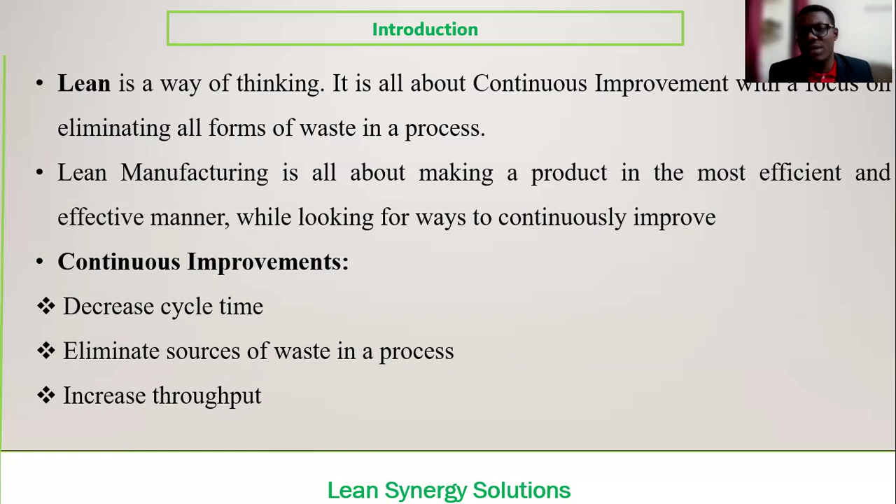And continuous improvement is also about lean thinking. You can actually see how best you can decrease your cycle time, which is very, very important to actually know the average time each unit is being produced. And also, continuous improvement can actually help you to eliminate waste in your process and also increase your throughput, which is very, very important. You can also streamline and see how you can optimize your lead time.

So we want to look into the history of lean. As you all know, there are pioneers, there are people who have contributed significantly in the lean thinking process. And one of the pioneers is Henry Ford. Henry Ford implemented the lean methodology in his assembly line in the early 1900s, working on continuous improvement.

And later, after the Second World War, another two pioneers, namely Taiichi Ohno and Kiichiro Toyoda, also took aspects of Henry Ford's new ideas for continuous improvement. They saw how best they could actually make this particular system more strategic. That is why they created the Toyota Production System, which is very, very important. So these are the pioneers of lean manufacturing.

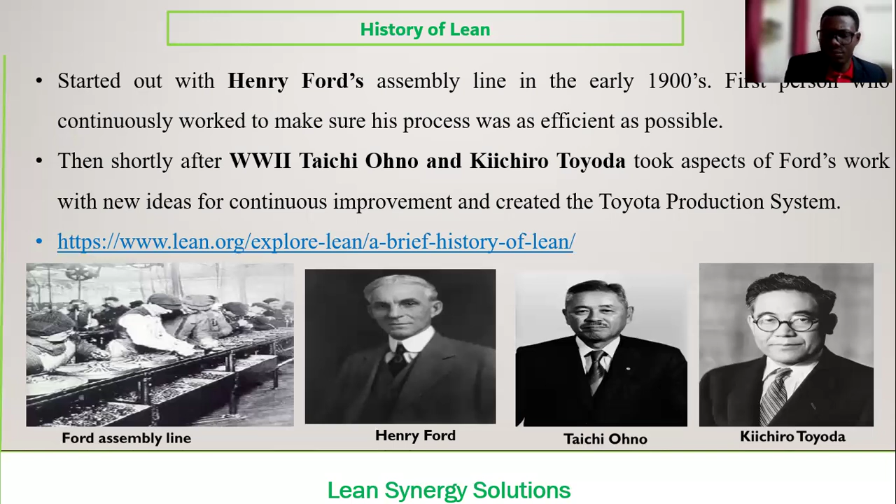So we want to look at these three key terms that are very, very important: Lean, Six Sigma and Lean Six Sigma. As you all know, Lean is talking about waste reduction, wherein you can actually use an iterative method. That is the PDCA: you plan, you do, you check and you act. That is why Lean is very important.

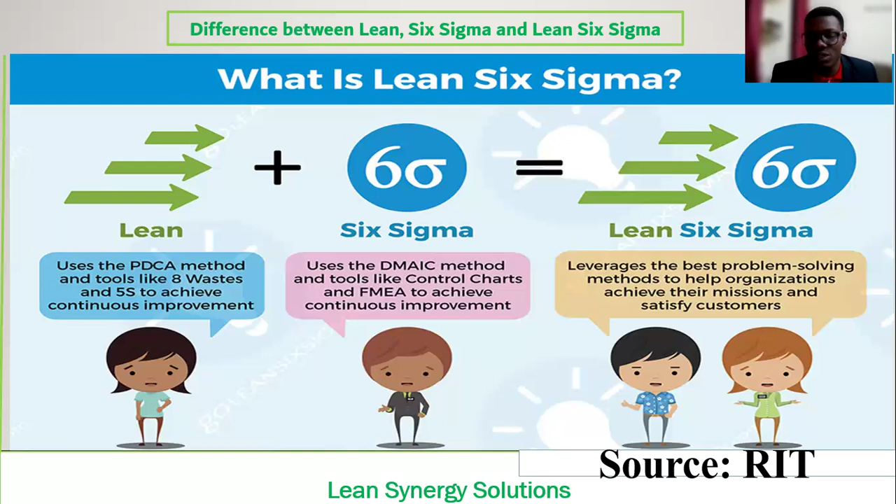When we come to Six Sigma, it is a data-driven methodology that can actually help you to define, measure, analyze, improve, and control your process. So Six Sigma is very, very important. It can actually help you with a continuous improvement strategy. And when you leverage Lean and Six Sigma, you can actually control defects and certain bottlenecks in your process, in your system, okay? So these key terms are very, very important.

So now we want to look at one of our lean tools, 5S. 5S is very, very important. It's a methodology that aims to improve efficiency and eliminate waste. And this one is an easy but powerful method of reducing waste and increasing productivity on your shop floor, in your small or medium enterprise. So therefore, each S stands for something that is very important.

So one is you have to sort. That is clearing. Sorting can actually help you to separate things that are frequently used or not frequently used. You try to sort items based on their usage, okay? And you try to set in order. Like I mentioned, frequently or not frequently used items, try to set them in order, wherein you can apply what's called a red tag to those things that are not being used.

And also, after setting the environment in order, you try to shine, that is, you clean, and you try to standardize, maintain conformity, and you try to sustain that, which is very, very important. So 5S is very important to ensure your environment is clean, because if your environment is clean, quality can be maintained. And even you as an employee feel good working in that environment.

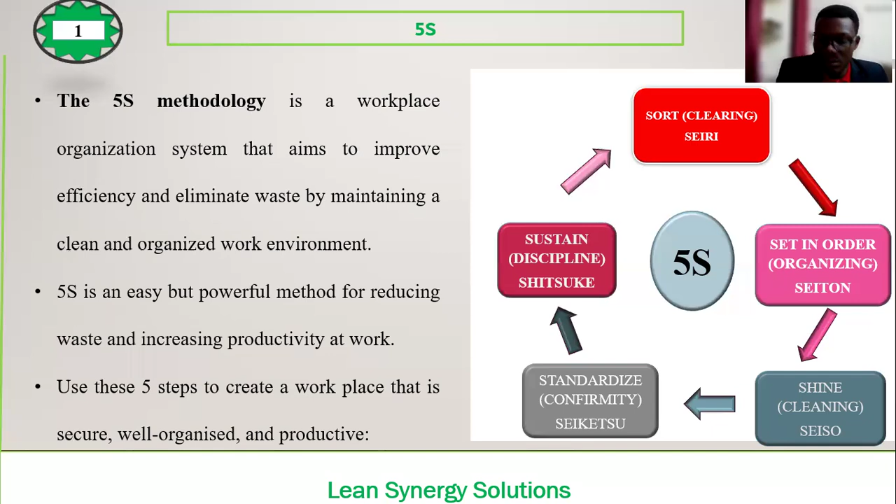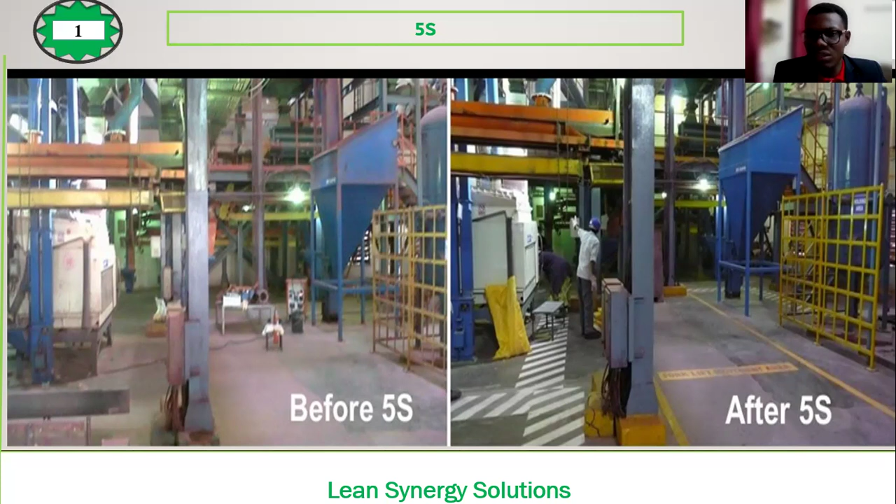As you can see, this is an example of this production plant. Before 5S, as you can see, and after 5S, you can see the environment is clean and you can see how things have been organized.

So we want to go into the second tool, that is the ABC analysis. As you all know, inventory is very, very important because inventory can help us to produce after receiving an order from the customer.

So therefore, your inventory can be your raw materials, they can be your work in progress, they can be maintenance and operation supplies. All these are inventory you have. So if you cannot manage them well, you run into losses, okay? And therefore, applying the ABC analysis can actually help you to classify items based on their significance.

For A, you have to categorize items which are very expensive, like maybe your maintenance supplies, which are very expensive. So you have to see how best you can actually control them, okay? And also for the B, you have moderate value inventory, okay? And C for low cost inventory. So knowing this ABC analysis can actually help you to categorize your items, which is very, very important.

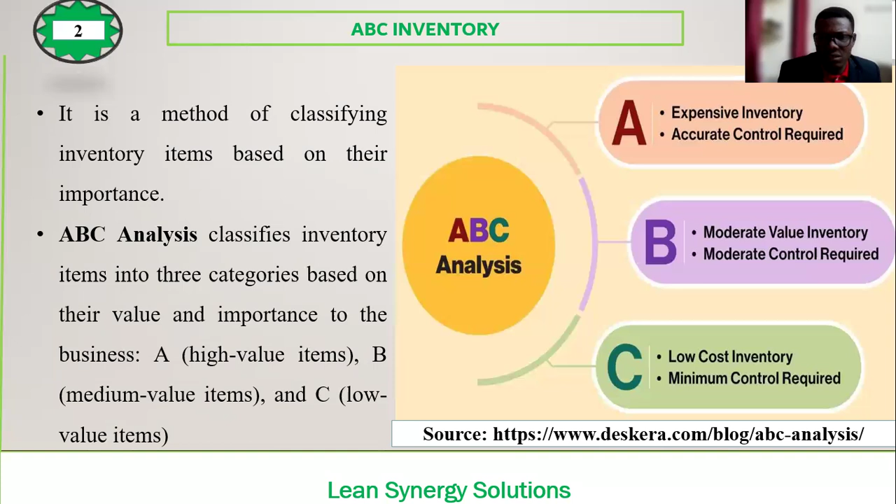Another one is the bottleneck analysis. As you all know, we have some problems, some bottlenecks in our production process. So trying to look into the bottleneck analysis can actually help you to identify inefficiency, constraints in the production process or in your services, okay? So therefore, bottleneck can occur anywhere in the process.

As you can see, an example here, the bottle, you see the neck. So there is a bottleneck problem. The balls cannot move out. So you can see there is a problem in the neck of the bottle, which is a very small one. So try to identify, try to streamline your process and see some constraints which can actually help you to optimize your process.

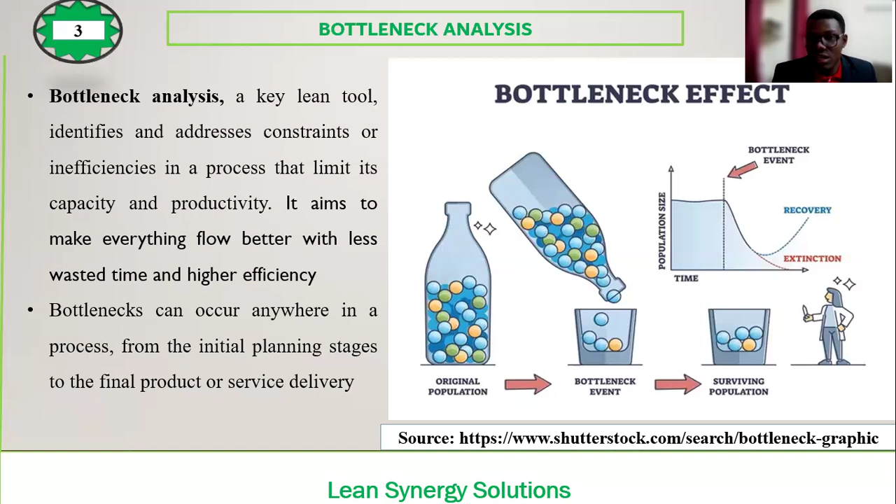Another one is the andon system. As you all know, we are in a digital era. Integrating technology into our production can actually help us, okay? So the andon system is a system that actually alerts operators about a problem, okay? So if operators see a particular problem, they go to the andon system, they alert everyone in that organization that something has happened.

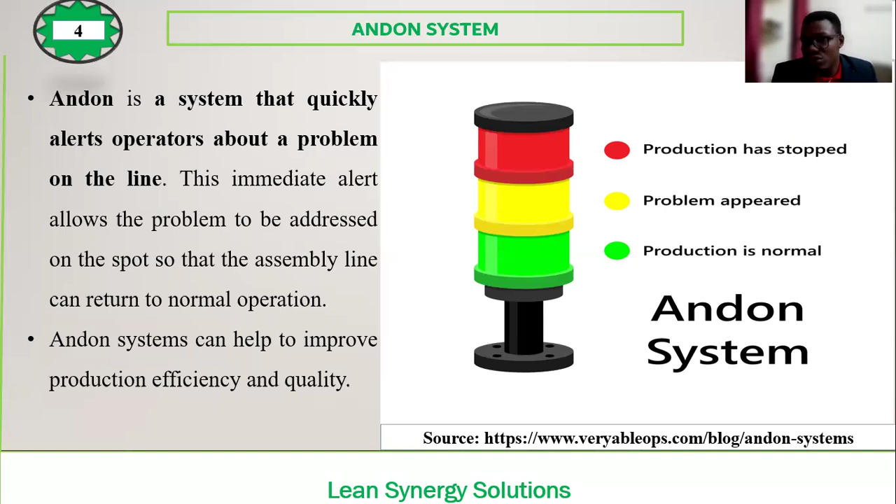And the symbol signifies something. Red, production has stopped. Yellow, a problem has appeared, and green, production is normal. So this particular system is very important. It can actually help you to tackle certain problems in your production process.

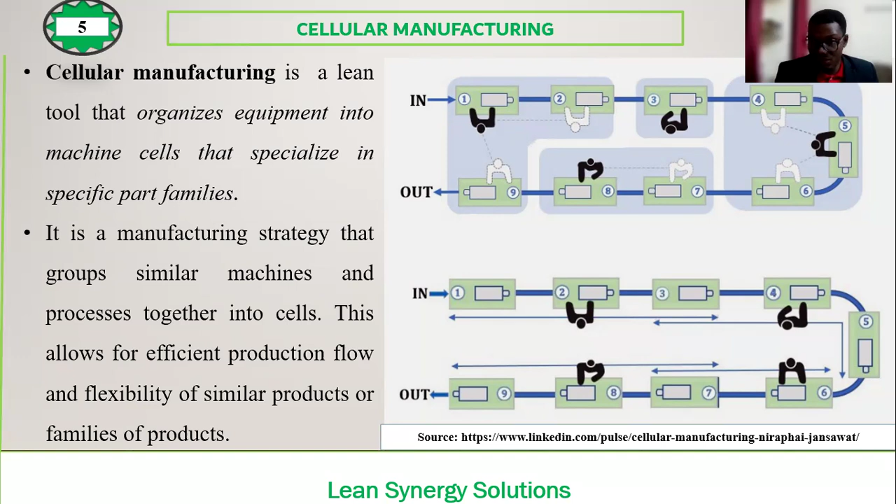Another one is cellular manufacturing. It's a lean tool that organizes equipment into machine cells that specialize in specific part families, okay? You try to organize machines that are performing similar functions together. This can actually help you to reduce the manpower, okay? And you can make your shop floor very organized. So cellular manufacturing is another lean tool which is very, very important.

We go to continuous flow. When you talk about continuous flow, it is also a key lean principle or strategy wherein you produce one piece, that is one piece flow, single piece flow, or make one, move one. Raw material coming, you try to finish that particular product. So therefore, continuous flow is a very, very good lean tool. It can actually help you a lot.

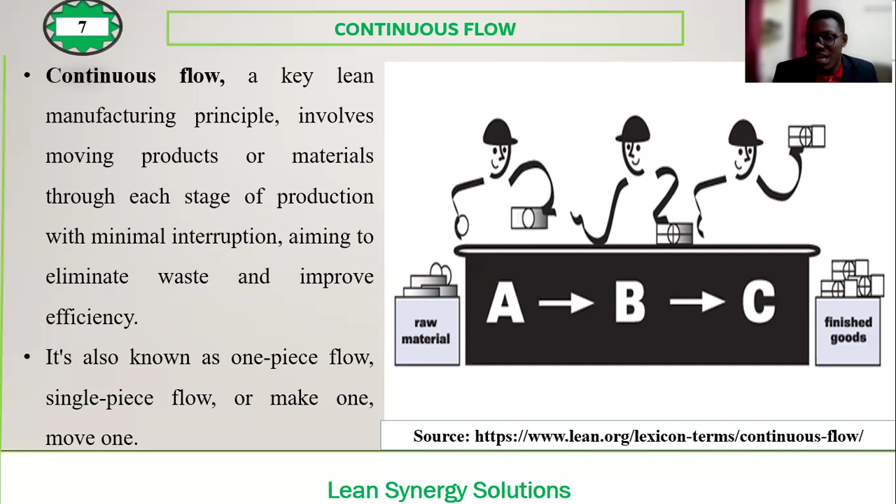Another one is Gemba. Gemba means the real place, the actual place where something is happening. So, therefore, trying to improve your process, you have to go to the real place. This can actually help you. You cannot sit in your office or wheresoever you make decisions. Go to the real place, try to identify. You understand? That is why we have 8 steps in the Gemba walk.

Identify the purpose of the Gemba. You try to ensure that you understand the process. You select a time and you observe where value is created and where value is not. That is why we try to know value-added activities or non-value added activities. And you try to observe the process, recognize how the process performs, you visualize the gap and try to create some opportunities for improvement. So therefore, Gemba walk is very, very important to actually improve or optimize your process.

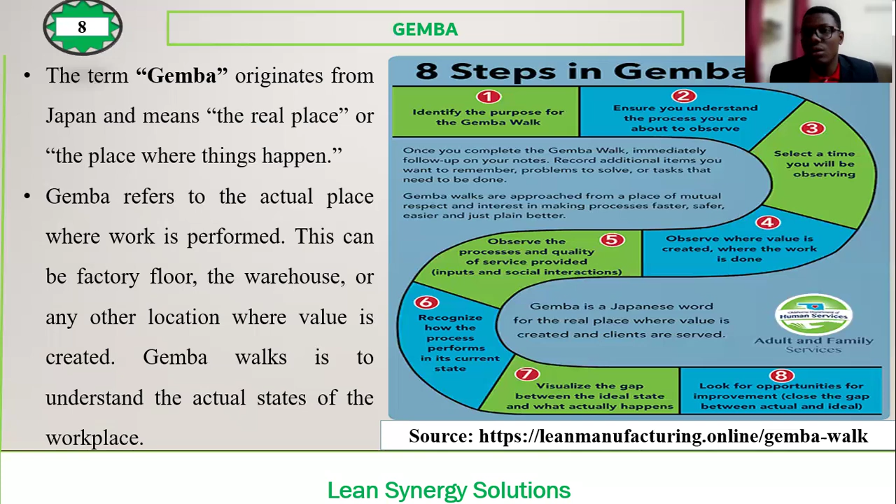Another one is Heijunka. Heijunka means leveling in Japanese. As you all know, every business, every company wants to see how best they can level up, they can scale up. So therefore, implementing Heijunka, you can actually produce with more uniformity. You try to reduce variability in your production process. That is why Heijunka is a very, very good lean tool. You try to make your production more predictable, more flexible, and more stable.

So therefore, Heijunka is a very, very good lean tool for you to level up.

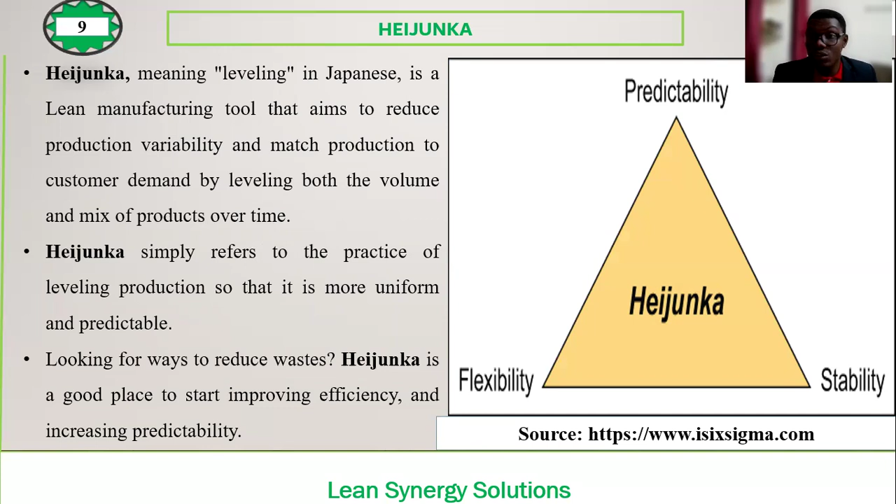Another one is Hoshin Kanri. Hoshin Kanri is all about policy deployment, wherein you ensure your company's strategic vision aligns in every aspect of your business. You try to ensure that the established visions or objectives align in all your management. This can actually help you to align the goals of the company, that is your strategy, the plans of the middle management, that is your tactics, and the work performed by all employees, that is operations. So therefore, policy deployment or Hoshin Kanri is a very, very good lean tool.

Because if your company has a strategic vision and that vision is not going down... we can say Hoshin Kanri is a top-down approach, and it is iterative, both top-down and bottom-up. You understand? Because you want to ensure your vision is being aligned in all sectors or all departments. So this is a very good lean tool.

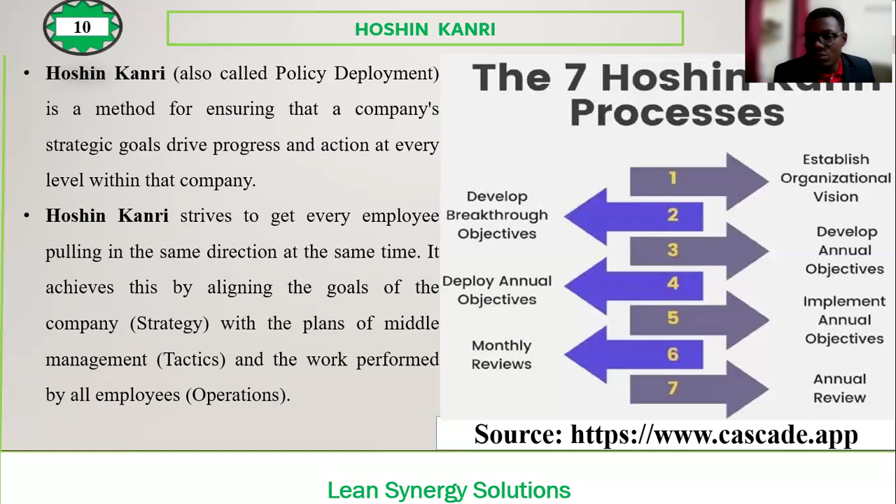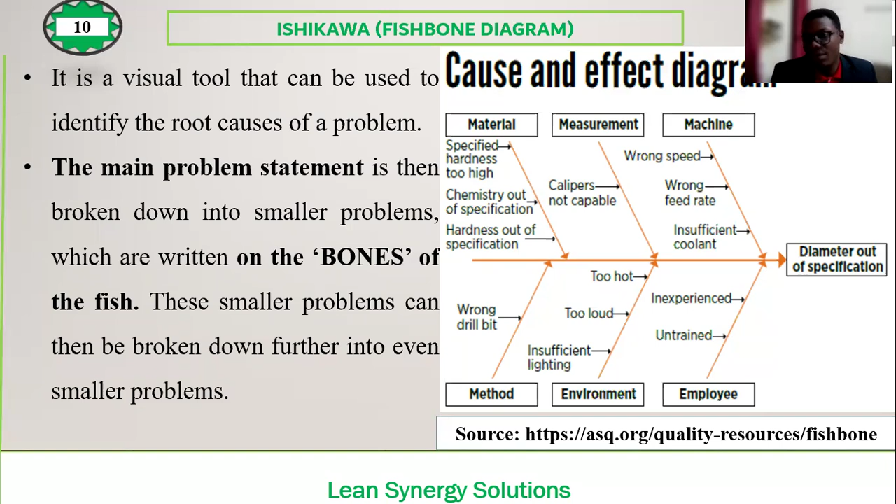Another one is Ishikawa, or the fishbone diagram, or the cause and effect diagram. This is also a very visual tool that you can use to identify the root cause of any problem, okay? And as you can see, you have the main problem, and this main problem can be broken down into smaller problems. And those smaller problems can be broken down into even smaller problems, as you can see. So this is an example. So the cause and effect diagram is very, very important for your root cause analysis.

And also we have another one, Jidoka. Jidoka is also a lean manufacturing principle that can actually help you to do quick identification and correction of problems, wherein you try to implement automation. You understand? Automation is very, very important to actually achieve scaling up and also efficiency and effectiveness of your production line. So Jidoka is very important. You try to ensure, like we have these robotic production lines, they can do things by themselves. So automation is very, very important.

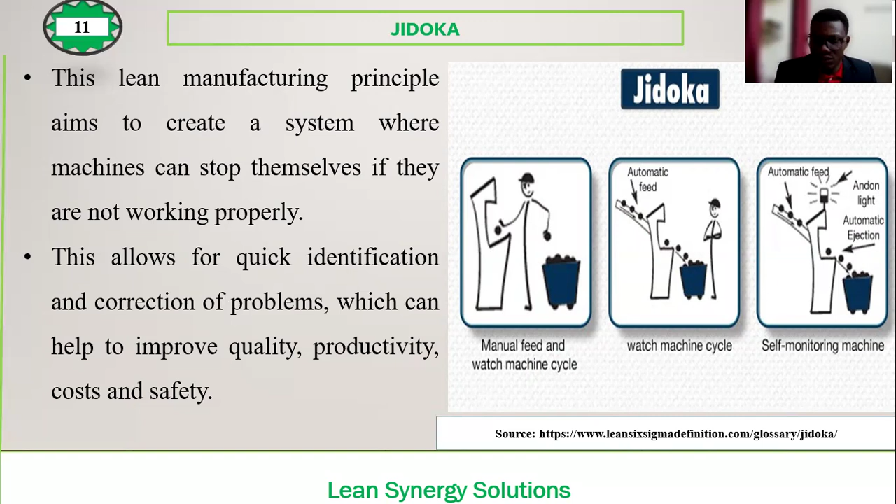Another one is just in time. Just in time is a very, very powerful lean principle. This can actually help you to produce or procure goods only when they are needed. This is like a pull system. You only do things when there is a trigger. And this can actually help you to manage your inventory and also to reduce waste. Okay, so just in time is a very, very good lean philosophy.

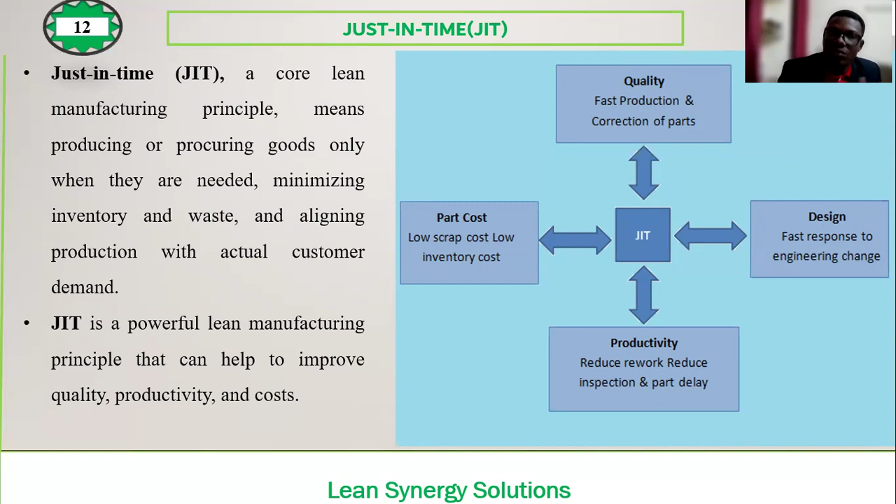Another one is Kaizen. As you all know, Kaizen is a philosophy. It's all about continuous improvement. It's incremental improvements, that is, small, small improvements. So implementing Kaizen in your business is very, very important. But there are several steps that are very important for Kaizen implementation.

Try to identify the problem, because if you identify the problem or the opportunity that you want to improve, it can actually help you. Another one is to analyze the current process as it is. Try to understand the current process and try to develop or identify ideal solutions. You implement those solutions, you study the results, and you standardize. So Kaizen is very, very important.

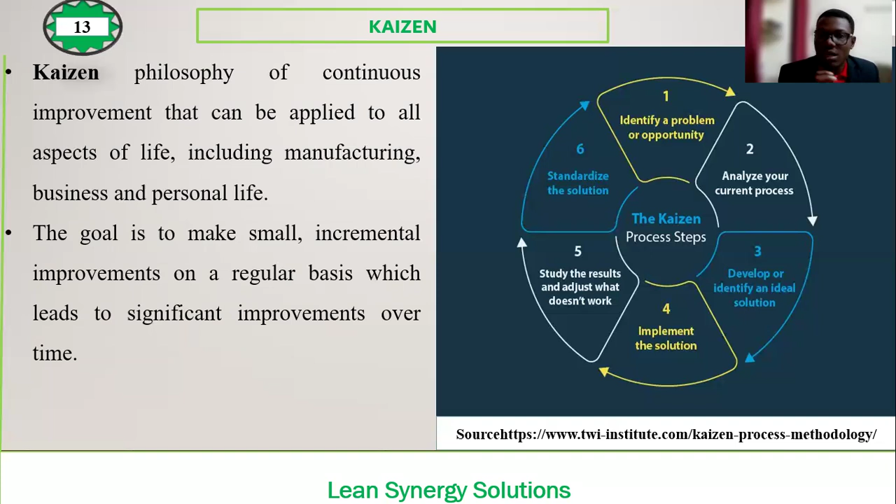Another one is Kanban. Kanban is very, very important. It is a visual tool that can help you to organize and track the progress of your work. As you can see, you can use a whiteboard or you can use digital software to actually control your Kanban process. Okay, like you can use Trello.

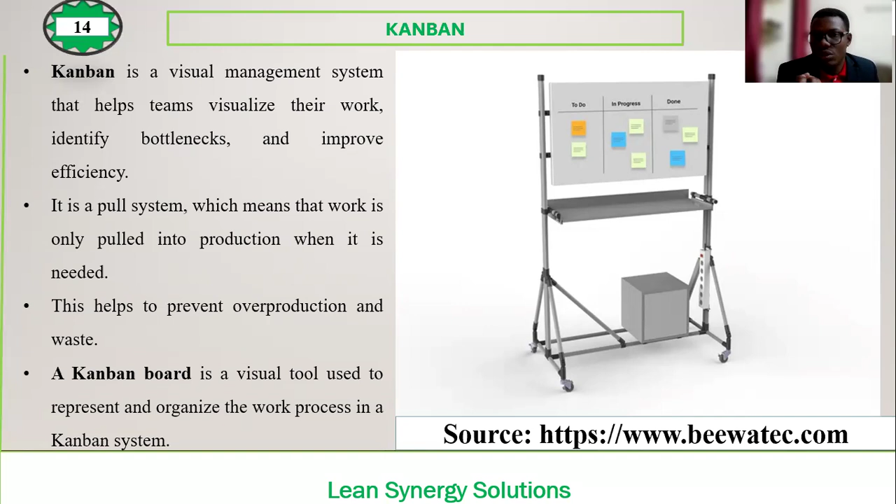We have a lot of digital software, but you can use a whiteboard for this, like to do, that is things you have to do, or backlog, work in progress, and done. So creating some columns can actually help your employees to visualize what they should be doing or what they have done. So this is very, very important.

Another one is key performance indicators. As you all know, we want to track the progress of our business. So therefore, understanding the key performance indicators can actually help you. These are measurable metrics that can determine the progress or the strengths or the weaknesses of your business. So the key performance indicators are very, very important.